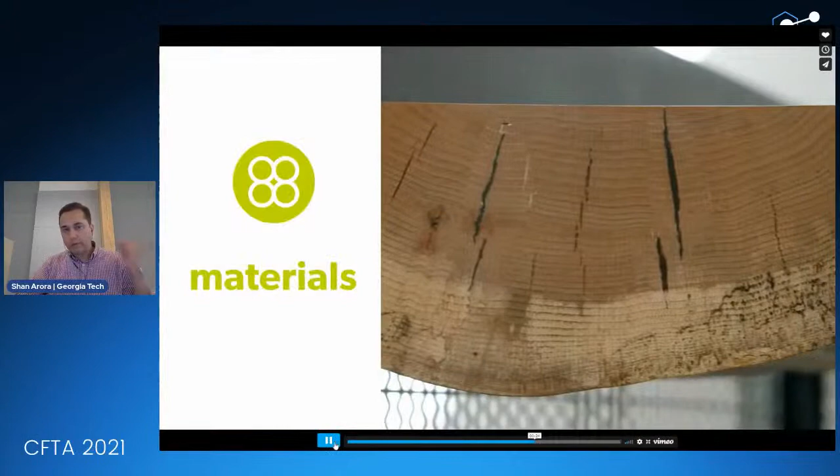So we want flowers to be the metaphor, and like the petal of a flower, the Living Building Challenge calls its performance areas petals. That's really what they are, they're petals. And there's 7 petals: place, water, energy, health and happiness, materials, equity, and beauty. So those are the 7 conceptual performance areas of the Living Building Challenge. And from conceptual, we go to the more detailed, and we'll get into some of that in a minute. Those detailed items are called requirements, called imperatives.

So there's 7 petals, and in those 7 petals there's 20 imperatives, and across those 20 imperatives there's about 600 things that you have to do. You have to do them, and the reason is because, going back to our flower metaphor, what happens to a flower when you pull the petals? It falls apart. So by requiring all 600 of these to be done, you are forcing innovation. You are forcing folks to say, I don't have a way out of this, I've got to do it all. And if you've got to do it all, you've got to innovate. That's why it's called a challenge, my friends.

There are only 28 fully certified living buildings in the world. Only 28. And the reason is, this is hard. This is very hard. So why do it in the first place? Well, you do it to prove that it can be done, and to show other folks the way that it can be done. So we're the 28th in the world, right over here, Georgia Tech.

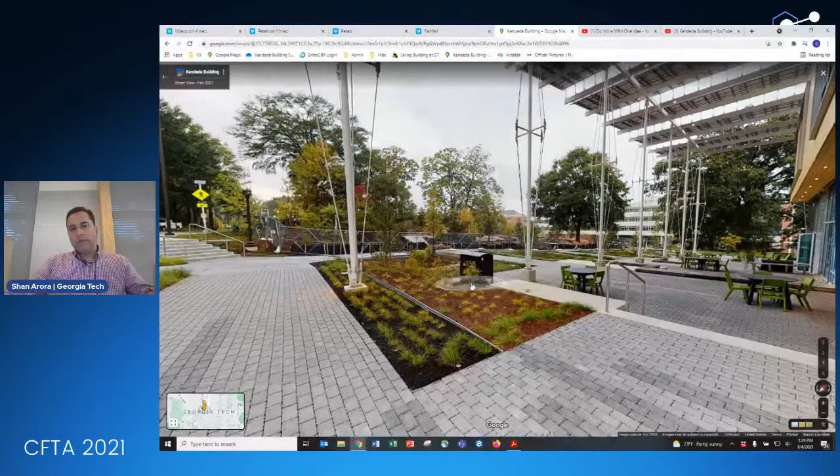It is about systems thinking, a systems approach. If we have single-use infrastructure, whether physical or information technology infrastructure, and we don't think about how to integrate disparate pieces of a building so they're working more in harmony to get to better, less burdensome outcomes for the building owner and the taxpayer, then we're missing opportunities. It takes longer on the design side, but on construction, post-construction, operations and maintenance, you can have tremendous advantages. Most users are probably going to like the outcome better.

We're going to spend a lot of time on water because water is not only the second petal, but water is life. We've spoken about rainfall, the water that goes into the sink and shower drain. In the Kendeda building, all that water is treated right here in a constructed wetland, using natural systems to treat that water and get it to a level where we can release it into the ground, where, just like a forest, the ground filters that water further until it hits a creek, a stream, and ultimately one of our region's primary rivers.

Another type of water is the water you collect from an HVAC system. Our building does not have a conventional HVAC system—those are very energy intensive. What we have, now at the roof, we have magically transported ourselves to the roof of the building. What we have is a dedicated—and now I'm inside, sorry—

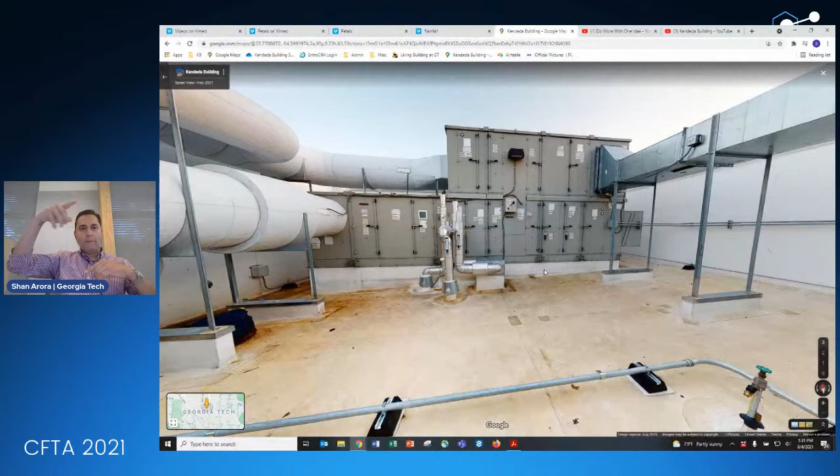we have a dedicated outdoor air system. What that does is take cold, stale air from the inside, push it outside, and bring in hot, humid air in the summer from the outside. Using the laws of thermodynamics, there's an energy wheel inside—cold air sinks—and we're using that cold air from the inside to lower the temperature of the hot, humid air. Then we're stripping that hot, humid air of humidity, because it's humidity that really makes us uncomfortable.

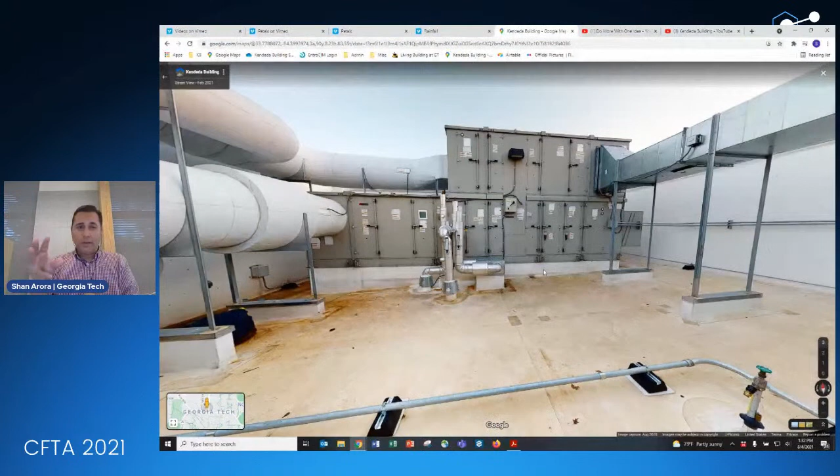How many of us have been in a conference room? If this was live right now, we'd be in a conference room somewhere, and we would all probably be extremely cold—freezing in the middle of summer—because we use air conditioning for cooling and we use air conditioning for dehumidification.

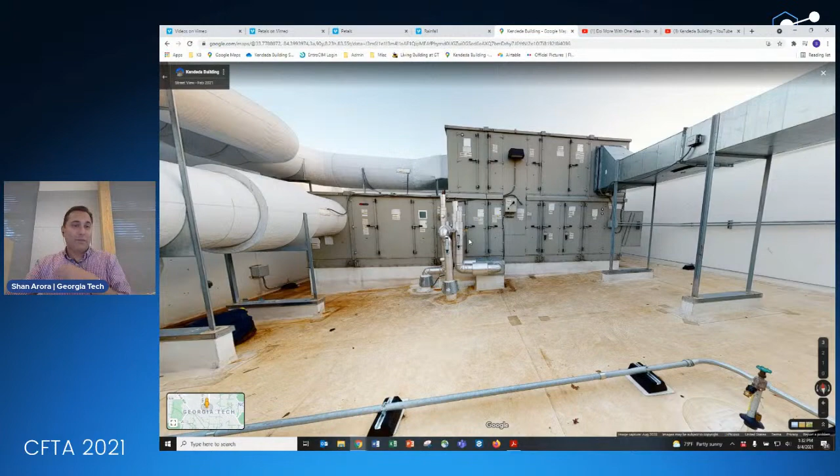Here, what we really use for dehumidification is a dehumidifier, so obviously we're going to have lots of condensate. We do not waste that condensate. And then perhaps what gets the most attention—I am now on the second floor of the building—is our composting toilets. Instead of going to the bathroom in drinking water, we go to the bathroom in a toilet that has a foam-activated flush, using about a teaspoon of water per flush. You do your business in the building and you leave; your business stays in the building.

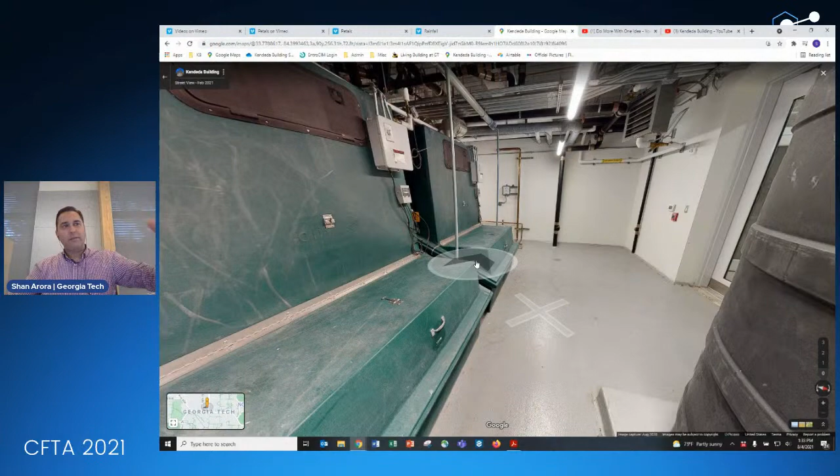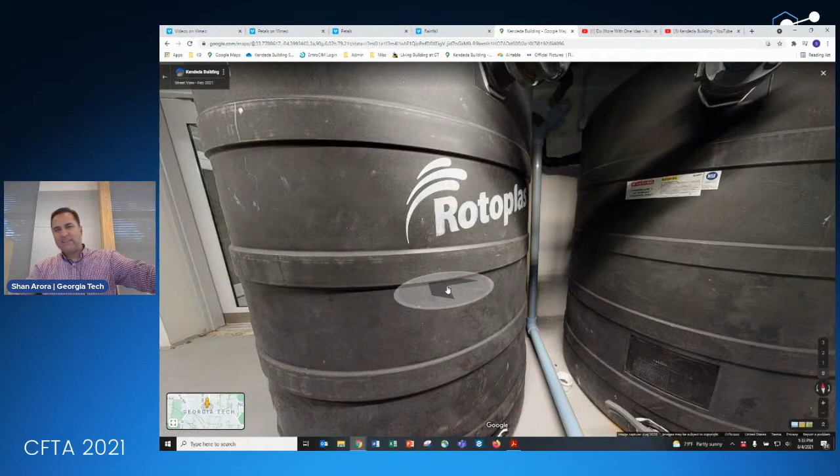We're going to now go straight to the basement. Your poo and pee end up in one of these six bins—there's three bins on the other side as well—where natural systems decompose your biosolids and liquid, and ultimately what we have left is 2,000 gallons of compost tea. It takes about four to six weeks to fill up these 2,000 gallons. The solids take years, a decade or more. And what we have, folks, is a system that doesn't connect to the sewer at all. Does not connect to the sewer.

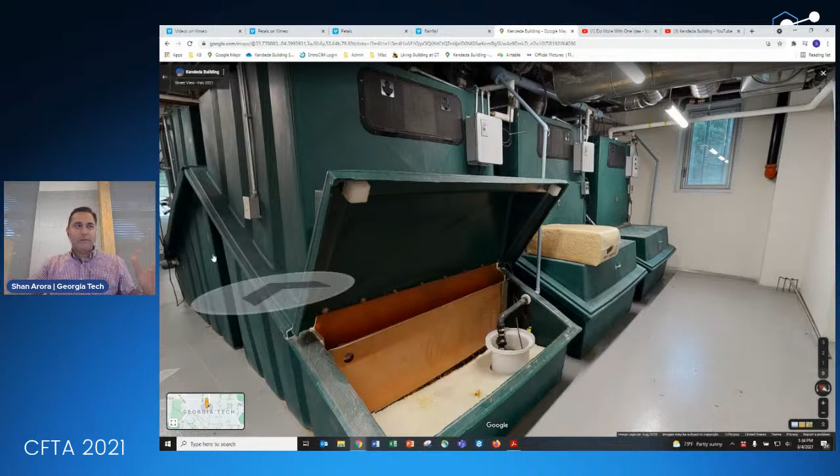So from a water perspective, by the end of this month, hopefully, we will be a fully certified municipal water treatment system. That means when you turn on your tap, anywhere you are, there's a municipal water system providing you that potable water. We will be our own municipal water system. So we're going to take the rain that falls on our site, purify that to drinking standards, and use that purified water for everything.

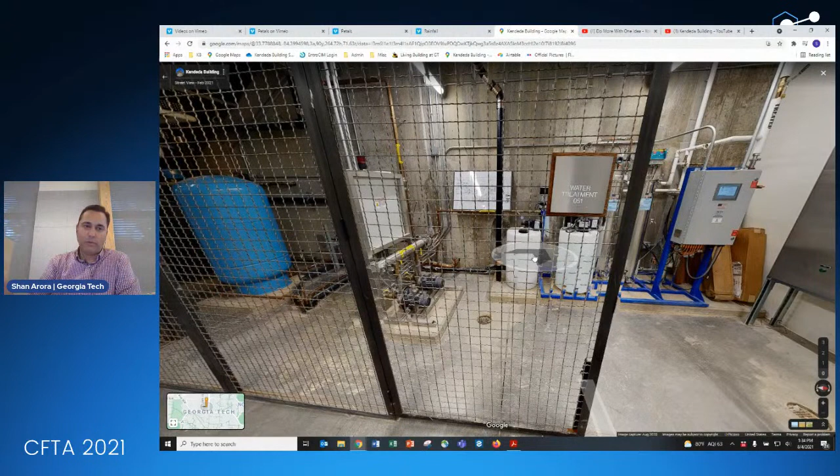Once it's used for hand washing and showers, our constructed wetland up front takes care of purifying it, and then it goes into the ground soil. Once you use it for flushing, or rather foaming a toilet, your bio waste stays here. The building does not connect to the sewer from a bio waste perspective. It's a closed loop, right? That is not single-use infrastructure. That is multiple-use infrastructure.

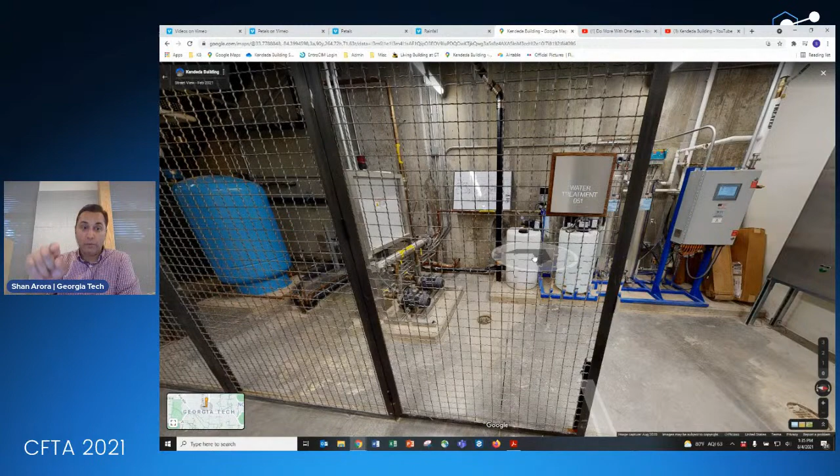On the energy side, it's pretty simple and straightforward. No matter where you are in the world, the basic techniques are the same. Now I'm at the second floor of the building because I want y'all to see the various pieces of how to get to net positive energy.

You construct a very efficient building. This building is about 3 times more efficient than code. We have triple pane glass, lots of insulation, and very efficient mechanical systems. I've already shown you the dedicated outdoor air system, and there are other things we're doing to dramatically reduce the amount of energy consumed by electrical systems.

Then we have a 330 kilowatt rooftop solar power station, which combined with these pieces resulted in the building producing 225% of the energy it needed during its 12-month performance period. Or to put it another way, the building produced enough electricity for itself, its twin that doesn't have on-site solar, and still had 25% left over for the rest of the campus.

Our goal was 105%. We got to 225%. So if we wanted to prove you can build a net positive building in the hot, swampy South, we proved it 2 times over.

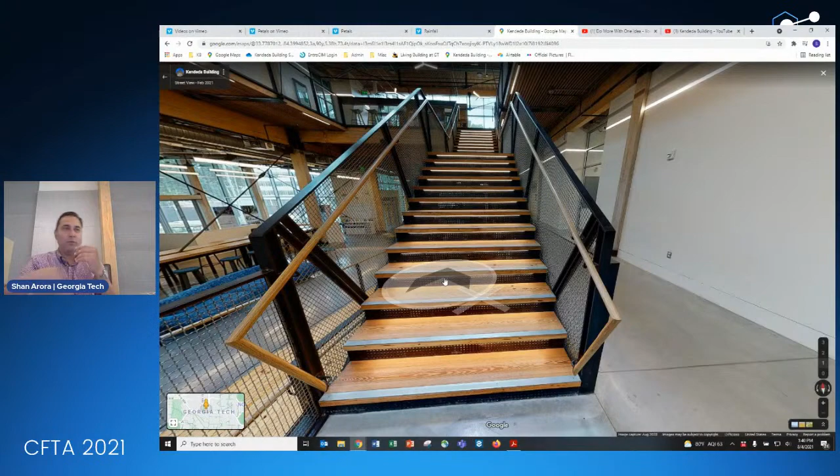These are trees that fell down of natural causes on campus that we repurposed—now I'm on the second floor—into our live edge countertops. That far wall on the exterior, on the other side, as well as this ramp, that is salvaged wood that came from a building that had to be torn down to make way for Georgia Tech's new police station.

What we've learned is folks inherently understand that we shouldn't be throwing things away. They know that we could be doing better. And when they see the beautiful materials that we've salvaged, they start thinking, okay, this is again a single-use infrastructure moment where we've designed the system to fail. Our system does not have a way of capturing and storing what is otherwise a perfectly amazing source of building material.

Georgia Tech has incorporated this concept of salvaging materials and reusing them in other buildings and projects, but admittedly right now it's rather limited, in part because there isn't a normalized supply chain for these items. One of the things we really hope happens is that there's a growing trend and demand for 100% salvaged material, like the bricks we have in the building.

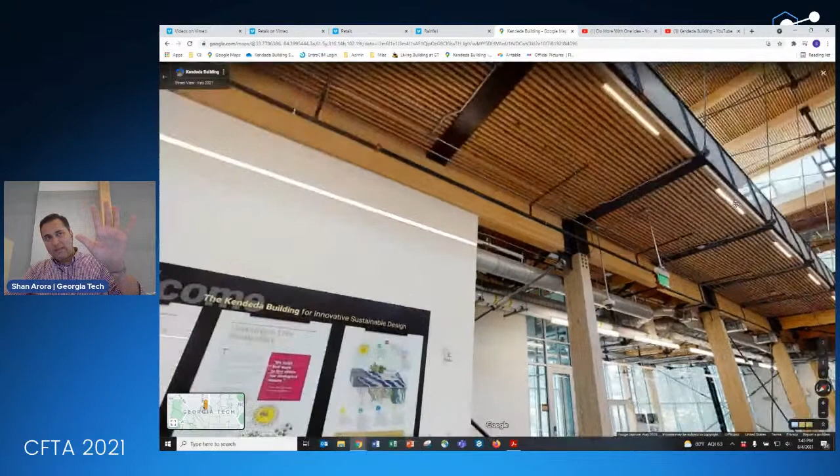And then these 2x6s, they were too long, and we had to cut the ends of those 2x6s. But instead of throwing them away, we turned the ends into these stairs. You count them? That's 6 things.

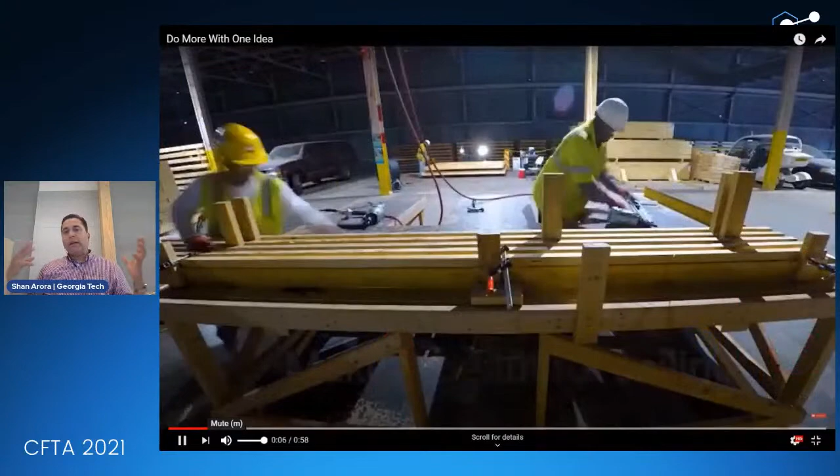But we didn't stop there, because the Kendeda building and the Living Building Challenge is asking us to do more with one idea. So you're constantly thinking, what else can I do? What else can I do? What else can I do? So we started thinking about equity in the built environment. And what we realized was very few of the workers who work at Georgia Tech are from some of the lowest income communities that border our campus.

So we reached out to a nonprofit that focuses on helping homeless men get off the street. One of the ways to do it is through workforce development. The 6 individuals, some of them you can see here, helped us construct that ceiling. And what they got from that was marketable skills that helped them move ahead.

So if there are 3 things I want y'all to remember from today, it's the following.

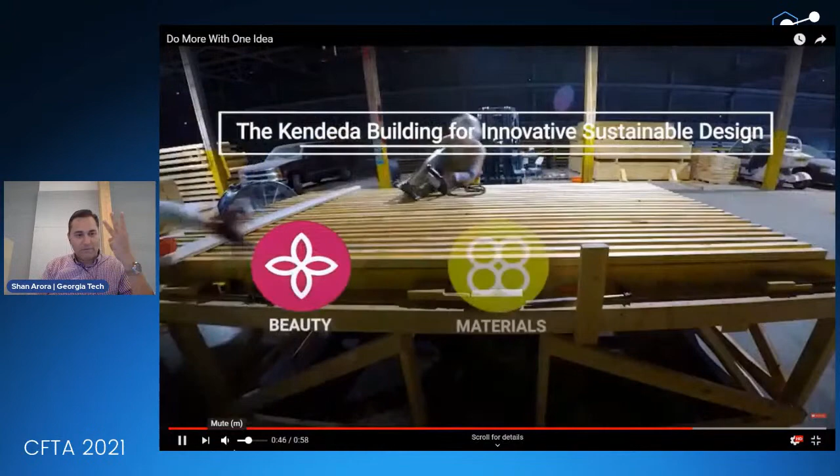Do more with one idea. Now, whatever it is that you're doing, always think, what can I do better? How can I create the next best thing? Do more with one idea.

Single-use infrastructure is no longer an option. So whatever it is that you do, always be thinking about, if I'm doing this one thing, is there a way to make it do more than one thing? Single-use infrastructure is not an option.

And the third thing I want you to remember is, hopefully you never forget what you have learned today. Once you know that you can build a building better, don't forget it. That's what we like to think happens with anyone who looks at the Kendeda building or experiences it, that they're just not going to forget this. And they are going to take these things with them and be the change agents in their communities.